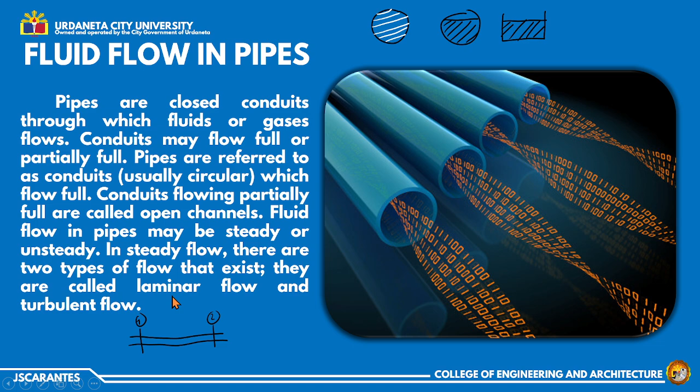And then for steady flow, there are two types of flow that exist, called laminar flow and turbulent flow. To give definitions for these two, let's move to the next slide.

Let's start with laminar flow. Laminar flow is defined as that type of flow in which the fluid particles move along a well-defined path or streamlines, and all the streamlines are straight and parallel.

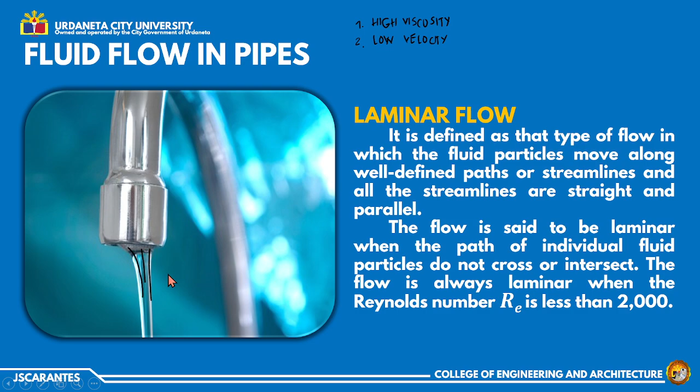And then yung isang type of flow naman is yung ating turbulent flow. Ito yung kabaliktaran naman ng ating laminar. It is defined as the type of flow in which the fluid particles move in a zigzag way. Dito naman, kung drawing natin yung ating path, fluid particle path, possible yung isa pa ganyan, pag ganito, ganyan. Kumbaga, nag-intersect na yung ating mga fluid paths. Kaya siya nagiging turbulent flow na.

And then kapag Reynolds number naman ang pinag-uusapan, generally, kapag yung ating Reynolds number na na-compute is greater than 4,000, no? Sabi dito, exceed 4,000, so that is considered as a turbulent flow na. So recall lang natin, yung isa kanina, does not intersect, tapos dito, nag-intersect na yung ating mga fluid particles. Kumbaga yung isa is smooth na flow, ito is yung ibang word, opposite ng smooth. So hindi naman rough, no? So turbulent and laminar flow. Leave it as that na lang muna.

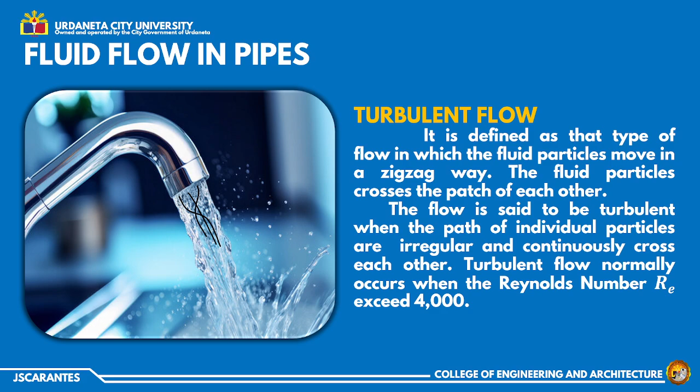And then dito, meron tayong third type pala, hindi lang laminar and turbulent flow, meron tayong transition flow naman. Etong transition flow, if the Reynolds number is between 2,000 and 4,000, so we observe a flow in which we can see both laminar and turbulent flow together. So this flow is called transition flow.

So the Reynolds number equal to 2,300 is usually accepted as the value at transition. So Reynolds number that exists anywhere in the transition region is called the critical Reynolds number. Dito, combination siya nung dalawa, laminar flow and turbulent flow.

Dito initially, no? Smooth pa lang or hindi pa nag-intersect. Parallel pa lang yung ating mga fluid particle path. And then syempre, nung tumama siya dito sa baba, nagkaroon na ng disturbance. So that caused sa mga fluid paths to intersect with each other.

So dito, take note of the number. 2,300 usually accepted as the value at transition. Pero dito, no, kapag board exam type, kinukonsider nila na turbulent na kapag greater than 2,300. Pero yung pinaka-definition talaga ng Reynolds number, no?

So pag less than 2,000, that is laminar. Kapag more than 4,000, that is turbulent na. Pero minsan kasi, pagdating na sa mga board exam type question, pag nagkaroon na ng value ng Reynolds number equals to 2,300, hindi na siya transition lang, no? Pero kino-consider na rin siya as turbulent flow. Pero siguro indicate na lang nun, kung may indicate ko na lang if ever may ibigay akong ganong klaseng mga problem sa inyo, no? Pero ito yung ating, kumbaga, pinaka-concept, no? Pagdating kay turbulent and laminar, so less than 2,000 and greater than 4,000.

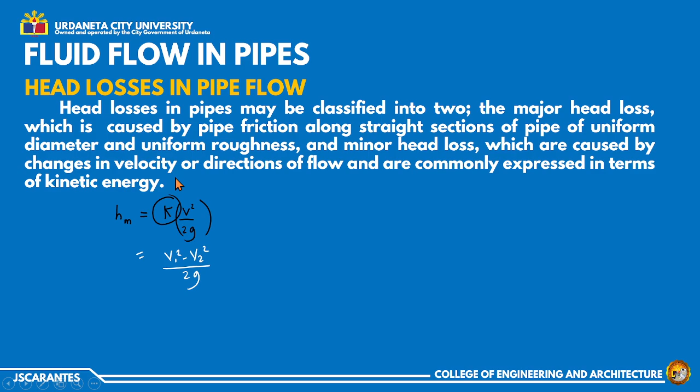At eto, pagdating kay minor head or major head losses, etong major head losses natin, H sub F ang ating notation. Bakit H sub F? Sabi nga natin, yung ating mga major head losses usually nag-o-originate siya dun sa ating friction sa mismong pipe. Pipe friction along the sections, sabi nga doon sa definition kanina. Pagdating dito kay H sub F, meron tayong tatlong sikat na formula.

So, una, dyan si Darcy-Weisbach formula or yung tinatawag din nating pipe friction equation. Dito, para makarakterize kung kailan gagamitin si Darcy-Weisbach, so kapag Darcy-Weisbach na problem, so lagi siyang merong ganyan na value. So, either hinahanap or given yung notation na yan. Bali dito, yung F na yan, tawag natin sa kanya is the friction factor. So, ang formula natin for all sections, so FL over D, V squared over 2G.

Sinulit ko lang na magkaibang fraction siya, pero pwede nyo rin namang pagsamahin. Kung gusto nyo, FLV squared over 2DG or D2G, so kayong bahala. Pero dito, sinulat ko lang as ganyan para makita yung relationship. Ito kasi, pag sineparate nyo, yan yung ating velocity head, di ba? So, kumbaga parang mag-multiply na lang kayo ng FL over D times the velocity head. Para lang kumbaga mas madaling memorize. Depende na lang sa inyo kung ano yung magiging diskarte nyo.

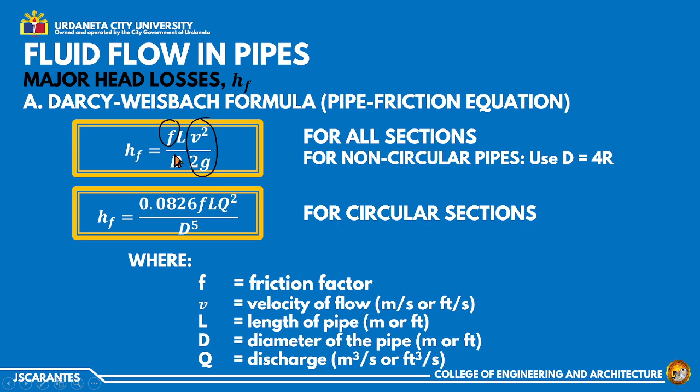Dito, pagdating naman sa ating mga values ng F, yung ating friction factor, meron tayong different formulas para sa kanya. Una, F is equals to 64 over the Reynolds number. Ito is para kay laminar flow. Take note, kailan ulit natin masasabi kapag laminar flow, kapag yung ating Reynolds number is less than 2,000. Yan yung ating magiging palatandaan. So, 64 over RE. And then, for turbulent flow, so Blasius equation, F is equals to 0.316 over RE raised to 0.25. Yan yung values ng Reynolds number natin between 3,000 and 100,000.

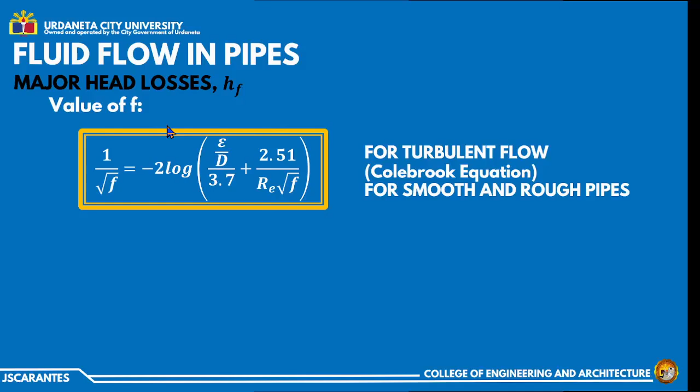That is for smooth pipe. And then another, for turbulent flow, Reynolds number up to 3 million. Yan yung ating formula naman. Kung papansin nyo, isa lang yung binigay natin na formula for the laminar flow, since yan naman talaga yung gamit na gamit pagdating kay F. And then another, meron pa tayong isa para kay turbulent flow. Ito naman yung kalimitan na gagamit kapag turbulent flow ang pinag-uusapan.

So yung formula ni Colebrook. Colebrook equation, medyo mahaba, no? Try to familiarize din naman. Kahit siguro hindi na yung dalawa, binigay ko lang yung dalawa to for your reference. Baka mabanggit sa problem. Blasius equation or Reynolds number up to 3,000, yung description sa problem. Yan yung mga gagamitin.

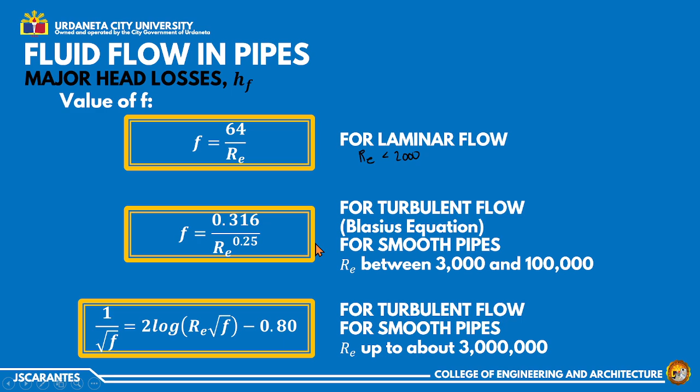Pero usually, hindi naman binabanggit yung mga yan. Kapag hindi binanggit, ang nabanggit lang sa problem, turbulent flow, ang gagamitin is si Colebrook. Dito, meron tayong, yung R sub e is the Reynolds number, yung F is the friction factor. That's negative 2 logarithm epsilon over D. By the way, yung ating epsilon dito, ang tawag natin sa kanya is the absolute roughness.

Absolute roughness. Wherein ang common unit niya na ginagamit natin is in millimeters. And then, yung term naman or yung fraction na epsilon over D, ang tawag naman natin sa kanya is the relative roughness.

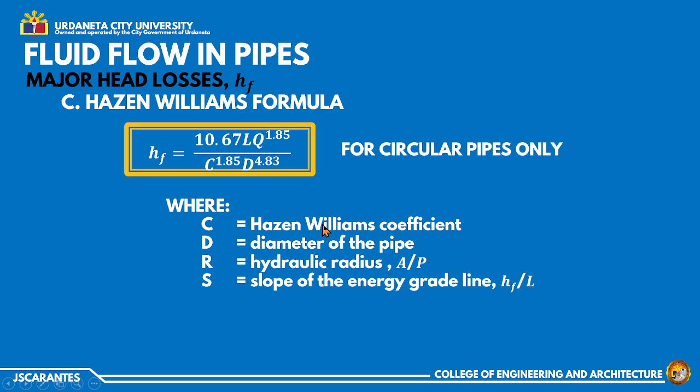So next, minor head losses, H sub F. Minor losses are caused by changes in direction or velocity of flow. These changes may be due to contraction or sudden enlargement, or change in direction, like valves, bends, and other pipe fittings. The losses can usually be neglected if the length of the pipeline is greater than 1,500 times the pipe diameter. So the bottom line is, if the pipe is long enough, we usually neglect these minor losses. Minor losses become critical when dealing with short pipelines, since the value we compute can become significant.

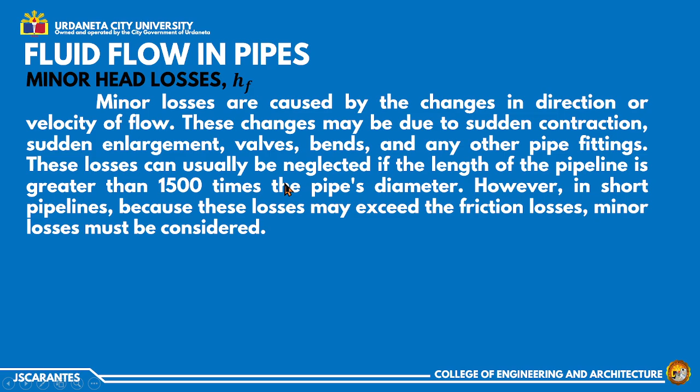So the first type of minor losses is sudden enlargement. What do we mean by sudden enlargement? Let's say initially the pipe looks like this, and then it connects to a much bigger pipe, so the shape becomes like this. Here, diameter 1 is different from diameter 2, with diameter 2 obviously being larger than diameter 1. So that's why it's called sudden enlargement - there's a sudden increase in the area of flow. From our continuity equation, we know Q equals AV, so since the discharge is constant for uniform, continuous flow...

...A1 V1 equals A2 V2. So the increase in area of flow affects our velocity. Here we define V1 as the velocity before enlargement, and V2 as the velocity after enlargement. So the head loss due to sudden enlargement can be expressed as V1 minus V2, squared, divided by 2G. Notice this is very similar to Archer's formula, except for the exponent. Archer conducted various experiments and approximated that instead of using exponent 2, the value is closer when using 1.92 as the exponent.

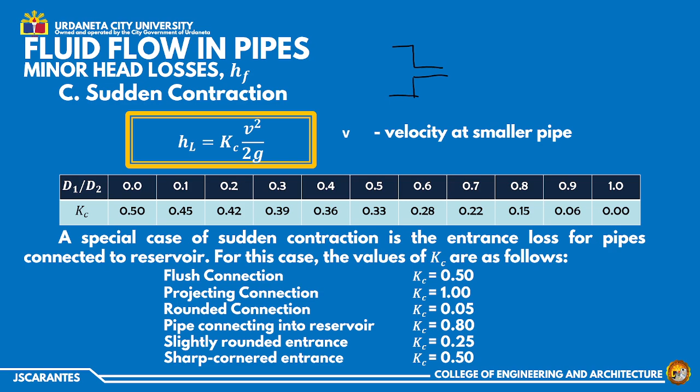So let's move on to the first sample problem. Sample problem number 1.

An oil of specific gravity 0.095 is flowing through a pipe of 20 cm in diameter. If the rate of flow is 50 liters per second and the viscosity of the oil is 1 poise, decide the type of flow. So what we need to determine is what type of flow it is.

Recall from our earlier slides that we defined the type of flow - under steady flow, it can be laminar or turbulent. It can also be transition flow.

Pero, ang bottom line lang dito, so kailangan nating i-determine ano yung value ng kanyang Reynolds number, para ma-determine ano yung type of flow na yon.

So isulat na lang muna natin formula for the Reynolds number. Okay ba yung block? Kita naman yung block. So Reynolds number formula, dalawa yun di ba? Yung una in terms of nu, so V, D over nu. Or yung isa naman in terms of mu, so we have V, D, rho over mu. Yun yung dalawang formula natin pagdating kay Reynolds number.

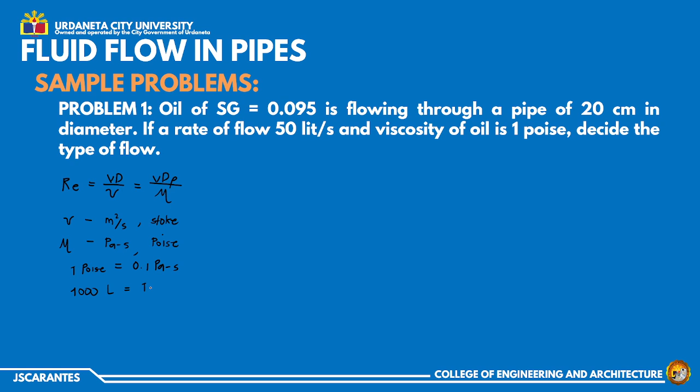Ayan na yung mga kailangan nating tandaan pagdating dito. At isa pa, yung ating rate of flow o discharge in terms of liters per second, mas mabuti siguro kung i-convert na natin ito into cubic meter. Ang conversion ulit natin dito, kada 1,000 liters, ito is equivalent to 1 cubic meter. Kaya yung ating discharge na Q na 50 liters per seconds, idi-divide mo yan sa conversion natin, so we have 1 cubic meter divided by 1,000 liters. Kung ito-solve nyo yan, yung discharge natin bali is 50 over 1,000 or that is 0.05

cubic meter per second. Take note, ito na yung gagamitin natin since in terms ng dynamic viscosity siya. Ano pa yung mga nawawala dito? Si V, wala pa tayong V. Pero si V kasi, from Q is equals to AV, so we know that yung ating velocity is equal lang to the discharge divided by A.

At nagbigay kasi ng diameter of the pipe, so hindi tayo magkakaroon ng problema kay A. Yun na lang muna yung unahin natin. Si velocity of flow is equal to the discharge na 0.05 cubic meter per second divided by area ng flow naman, so we have pi over 4.

So diameter niya is 20 cm, take note, unit analysis, ito is naka-meter, dapat gawin din nating meter ito, or this is 0.2 squared. Kung kukompute niya yan, that is 1.592

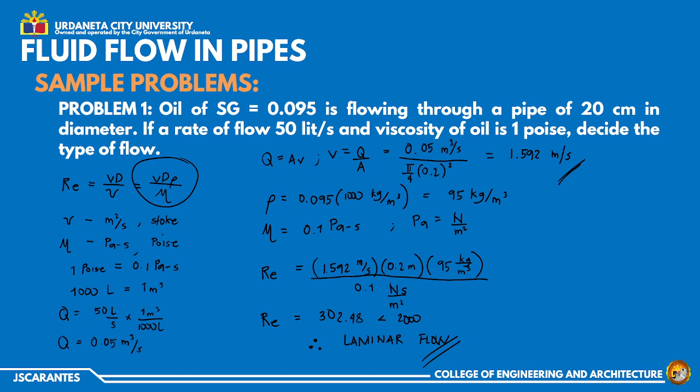For problem number 2, I think the solution will be a bit long. A new cast iron pipe must carry 1.2 cubic meters per second at a head loss of 5 meters per kilometer of length. Then compute the diameter of the pipe using, first, C equals 120.

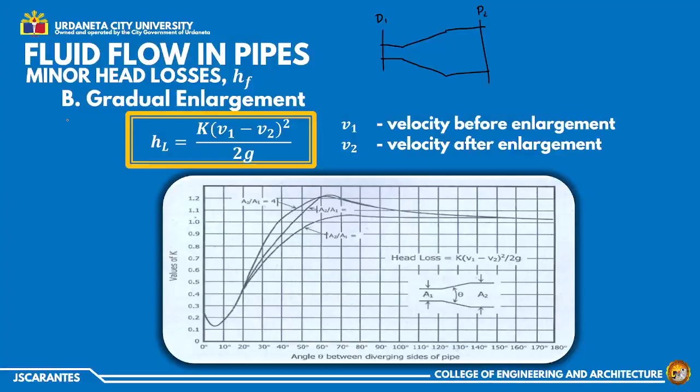Let's start with part A. For part A, the formula we'll use is for Manning's... since diameter is what's being asked, let's go back. So there's a flash on the screen — let's go back to Hazen Williams. Take note, what's being asked in this problem is the diameter.

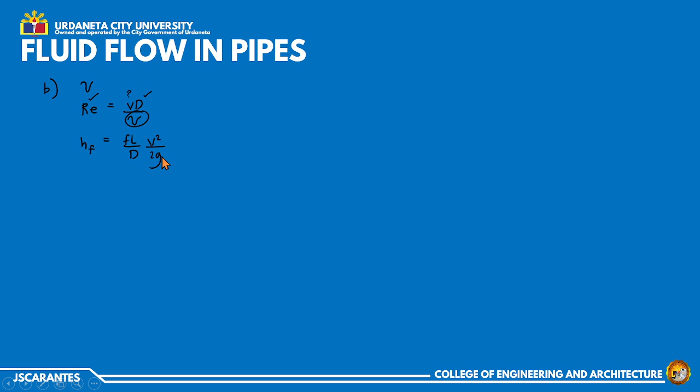Our HF is also given in the problem, equal to 22. And the friction factor we computed in part A is 0.034, times length of 150, divided by diameter of 0.2, then multiply that by V squared, the unknown, divided by 2 times G which is 9.81, the acceleration due to gravity. With this, we can now compute our velocity, which is equal to 4.114 meters per second.

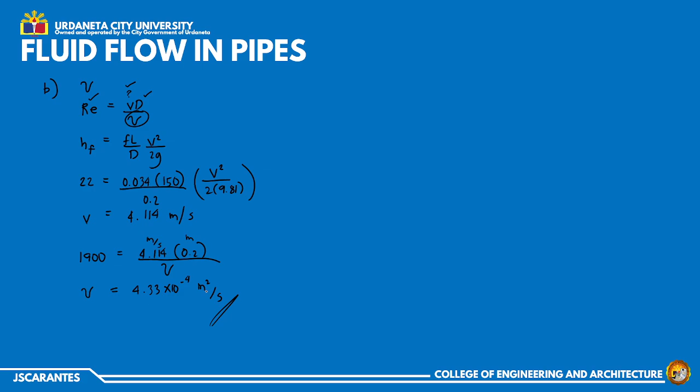For part C, what we're looking for is the rate of flow in liters per hour, the discharge. How do we compute that? We know discharge is equal to A times V.

Let's not go too far so we don't make this hard. We already have the diameter, so we can compute the area, and we already computed the velocity of flow. So let's plug in: pi over 4, diameter given as 0.2 squared, times the velocity of 4.114.

This gives area in square units, and velocity in meters per second. If we compute that, it will be equal to 0.129.

Let me try with more decimal places since this is small. Recomputing: pi over 4 times 0.2 squared times 4.114, we get 0.129245 cubic meters per second. And our target is in terms of liters per hour.

So let's convert. We have 1,000 liters per cubic meter, so that cancels. Then per hour, how many seconds is that? 60 by 60, so that's 3,600 seconds per hour, so seconds cancel, leaving liters per hour.

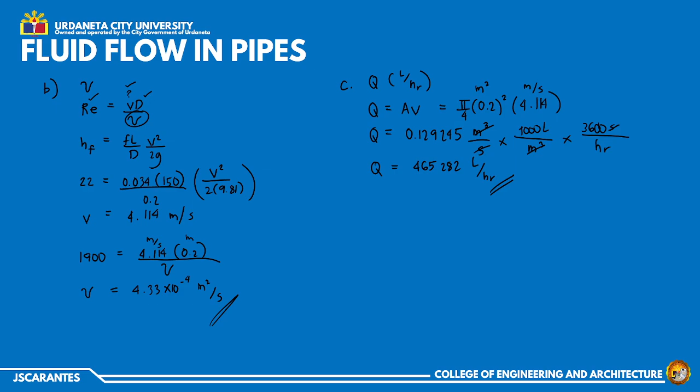I think this is our last problem for this topic. Problem number 4: a pipe flow in the figure is driven by pressurized air in the tank. Assuming the friction factor F is 0.014 and the flow rate is 13.6 liters per second, first find the velocity of water in the pipe, find the head loss in the pipe neglecting minor losses, and then find the gauge pressure needed to be provided.

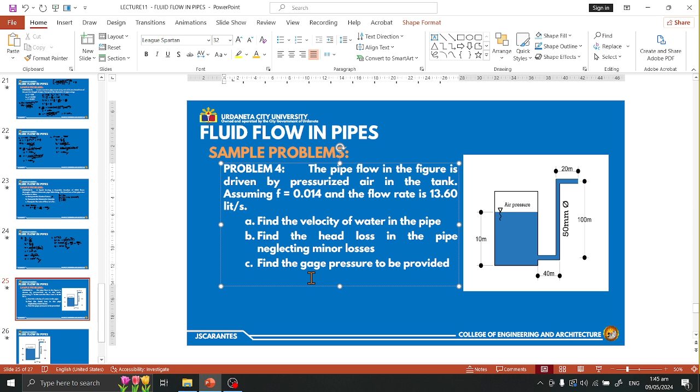For part A, let's go back to black. We need to find velocity - where does it come from? What are the given values? We have discharge of 13.6 liters per second. Let's convert that: divide by 1,000, moving 3 decimal places, giving us 0.0136 cubic meters per second.

We also have dimensions from the figure. The diameter of the pipe is 50 mm, let me write that down: the diameter of the pipe is 50 mm, or in meters, this is 0.05 meters.

F is 0.014. So let's go with that. We have discharge and diameter. With the diameter, we can compute the area. We know that discharge is always equal to area times velocity. So what we're looking for is velocity, which can be expressed as the discharge divided by the area of flow.

So for our V, our discharge is 0.0136, in cubic meters per second. We divide this by the area, which is pi over 4 times the diameter squared. The diameter provided is 0.05, or 50 mm. So 0.05 squared.

So we now have the value of our velocity, which is equal to 6.926 meters per second. That is our answer for part A.

Next, for part B, what's being asked is to find the head loss in the pipe, neglecting minor losses. When we say neglecting minor losses, what we're really talking about here are the major losses. For major losses, since what's given is F, we'll use Darcy-Weisbach.

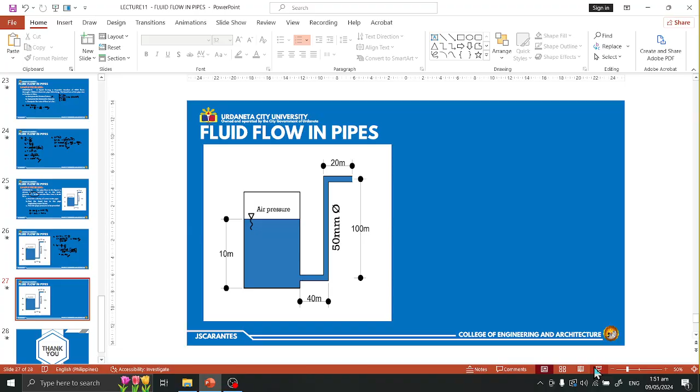For part C, what's being asked is the pressure inside our tank. Let's name this point 1, then at the opening of our pipe, point 2. This is pressurized air, meaning that compartment has the same pressure throughout - any point in that compartment is equal to the pressure at point 1.

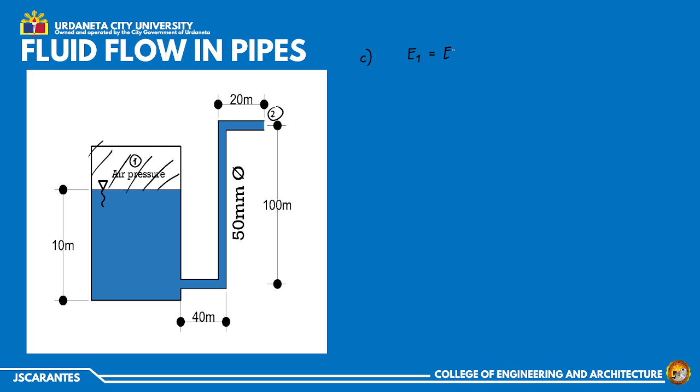Remember, the energy equation is just the summation of our heads. First, we have the velocity head, V squared over 2G. We have our pressure head, pressure divided by unit weight, plus our elevation head, which comes from potential energy - potential energy divided by weight, so mgh divided by mg, giving just h.

H lang yung matitira. So, dito, yung ginagamit nating elevation na notation is Z. So, i-expand natin ito, since meron tayong notation, so we have V1 squared over 2G plus P1 over gamma

plus Z1 is equal to V2 squared over 2G plus P2 over gamma plus Z2 plus yung ating head loss. So dito, ito yung 1 natin, and then 2. Para mas madali, meron kasing makakansela dito. Kung medyo nalilito pa rin kayo, kailan ba nagsisero si elevation, si velocity head, si pressure head.

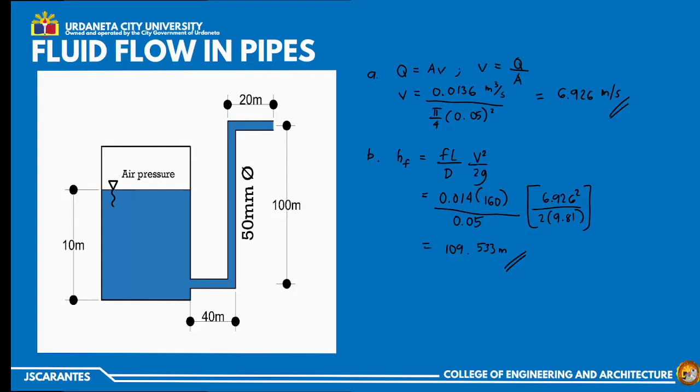6.926 ba yun? Check lang natin. 6.926, tama. So, 6.926 squared divided by 2 times 9.81, and then P2.

Si P2, so pipe opening yung pinag-uusapan, pag pipe opening, 0 na yung kanyang pressure head. At then yung kanyang elevation head, from the datum line, ang elevation daw ng point 2 is 100 meters. At then, wag kakalimutan si head loss.

Yung value ng head loss natin dito na na-compute kanina. Na-compute ba o given? May na-compute pala, 109.533, lalagay natin yan dito. 109.533, by the way dito pala, lagay na natin 9.81, this is in terms of kilonewton per cubic meter, since yung involved is,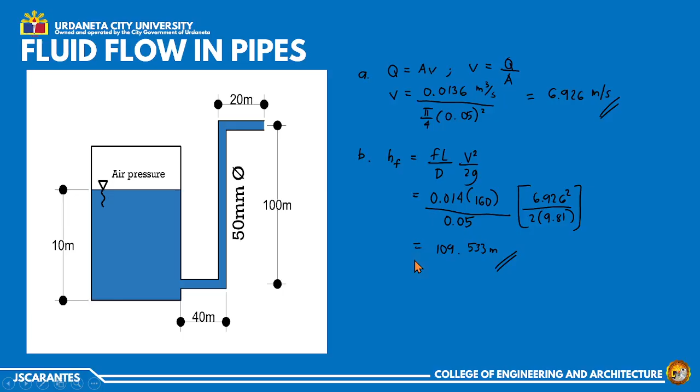Wala binagit pala yung liquid, so binagit naman dyan, water, 9.81, just to make sure lang, baka fresh water kasi, syempre iba nang usapan na naman yan. Lagi yung titignan, yung mga water or fluids na involved, baka may makaligtan kayong i-multiply na specific gravity. Doon ba kayo madali?

Kukumpitin natin yung value ng P1, so that will be now equal to, so we have 1981.403 kPa. Yan na yung ating computed value for our P1.

Medyo malaki, no? Which is, kumbaga, normal lang naman since sobrang taas din nung papaakyatin mo kasi yung tubig from 0 papunta kay 100 meters. Yung 100 meters na yan, imagine niyo na lang ilang palapag yan ng building. Kung yung isang palapag, let's say 3 meters, 100 divided by 3, that's 33 floors na. Medyo mataas-taas na din yung itatravel ng liquid, kailangan mo talaga ng mas mataas na value ng pressurized air na magtutulak sa kanya.

Normal lang yung value na ganyan, siguro kung ano lang 10 meters, mga ganun, konti lang yung kakailanganin mo ditong pressurized air. Recall nyo ulit yung ating tank, yung ating pumps and turbines, mga ganyang mga scenarios. Yan yung ating problem number 4, which is our last problem lang din.